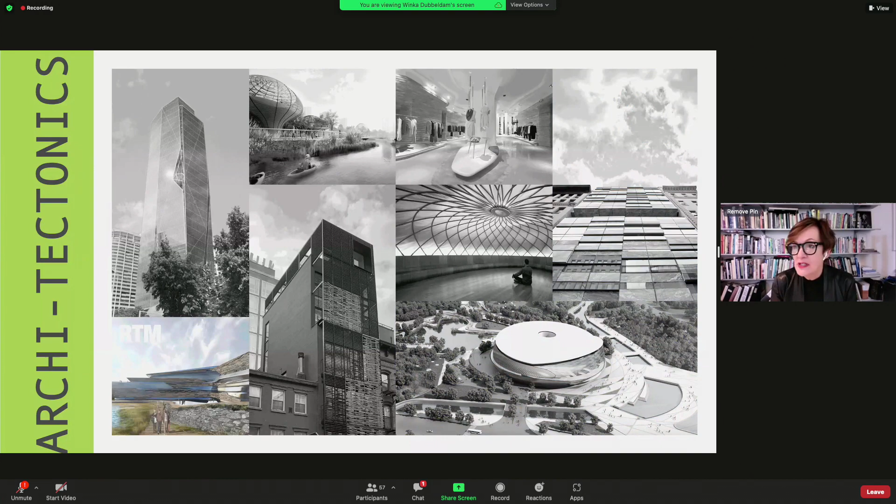So yeah, what you see here is an office that is trying to specialize in innovation, not in typology, so not like either commercial or residential, but really thinking about innovation in the widest sense.

I think also we look very much at the idea of a different kind of aesthetic or different kind of beauty that really comes from deep investigations or rigorous research, and hence will give the project character and identity, but not as much maybe what we would call a standard beauty.

We're more interested in the notion of the sublime, as mentioned by Edmund Burke, and his notion of terror and fear based on the sense of awe. So awe in the sense of understanding things that are striking, maybe even dangerous, or have an uncommon beauty or an uncanny kind of character.

So a lot of this will be investigated or is investigated in the prototyping phase. So this is just a small overview.

Most of our projects, of course, express themselves in built form, as you can see here, a glimpse of the Asian Games. But also we like to share our ideas with peers, with really any person.

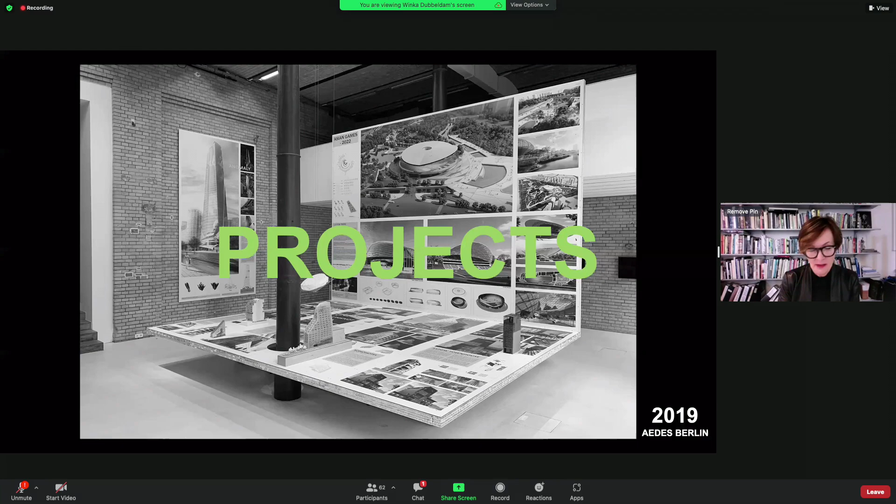Of course, books are ways that we otherwise also investigate both our own project, but also communicate this. These are the first 3 books that we published with 010 in Rotterdam, Princeton Press in New York, and DAP in Germany. And then the latest project is the Strange Object, New Solids and Massive Things.

And this book, rather than a traditional monograph, is really conceived as a manual and maybe itself as a strange object. And it reflects this non-standard way our projects come into being.

The book was designed by WSDA. You see on the left-hand side, Jonathan Jackson and Janet from WSDA, edited by Julia from Original Copy, Julia van den Hout, who's next to Janet.

And then next to me, you see my business partner, Justin Korhammer, and some people of the office that helped work on the book. There are more people, but I always say it's, you know, the virtual world is infinite, so you'll be on the other side of the slide.

And then this is the book. So WSDA really designed the book itself as a strange object in kind of an understanding of a below-the-surface manual or taxonomy of our work, and considers each project according to its particular formal or performative characteristic, thus establishing overarching areas of research and narratives, but also reflecting the singular nature of the design process and the final outcome.

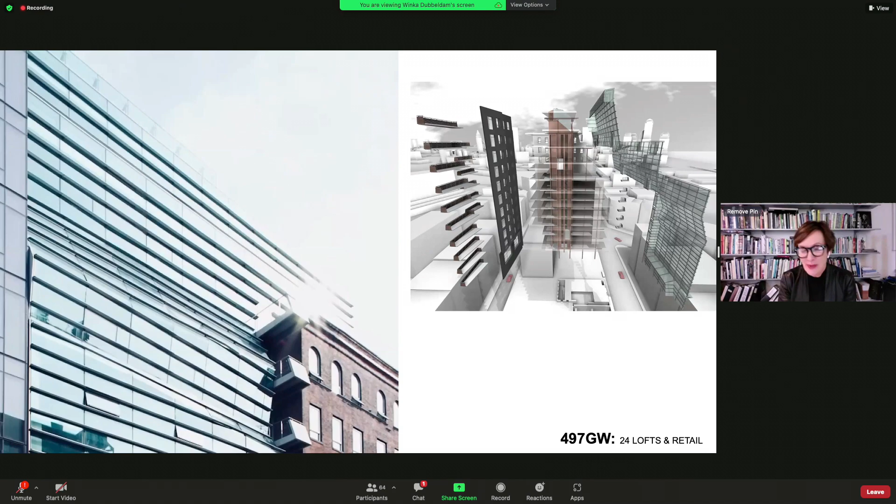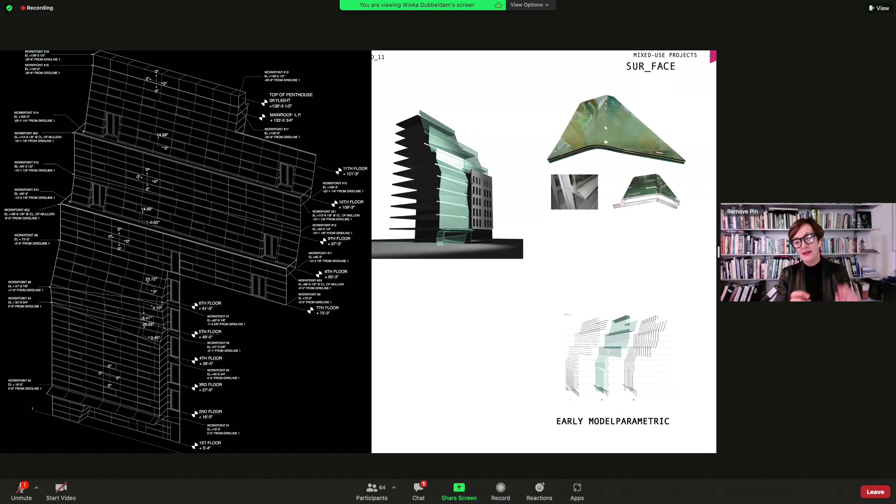One of the very first structures we built, very early on, is this building with folded glass. It was the first kind of idea of parametric thinking, where we made a 3D model. We sent only the XYZ coordinates to the people who folded the glass or extruded the mullions in the same direction of the glass, and also separated vertical and horizontal mullions, with vertical being welded thin steel holding the glass at a distance, and the glass itself not being a grid but a set of bands.

Very shortly after, we got interested in making a landmark building in Tribeca, of translucent stone - one of the first buildings to have translucent stone on the outside. Usually it's a beautiful alabaster skin on the inside. This building glows by day on the inside, by night on the outside, and it kind of rethinks the idea of a landmark.

Normally in New York you'd copy a landmark building, but looking at the landmark district, every building was different. So I proposed to the preservation committee to look at proportional systems and material quality, and go from there. We took the rhythm of the two neighbors, intersected it over our building, and came up with a 3D pixelation for the facade.

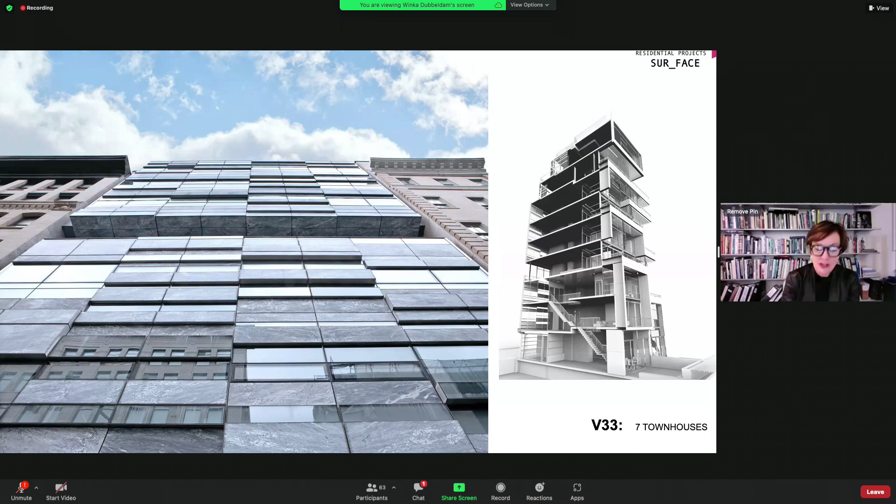That we prototyped in Italy. The stone originally used in Tribeca comes from, funny enough, a quarry in Portugal. So we went to Portugal, got the same stone, and then worked with a facade consultant on getting this 3D pixelation in a way that also made the facade openable and varying at all times.

This prototype was made in Italy. We had German mullions - the only ones who make thin steel reinforced mullions, called Schüco. Schüco is actually made in America in a very dumb system, so we could not fathom using that.

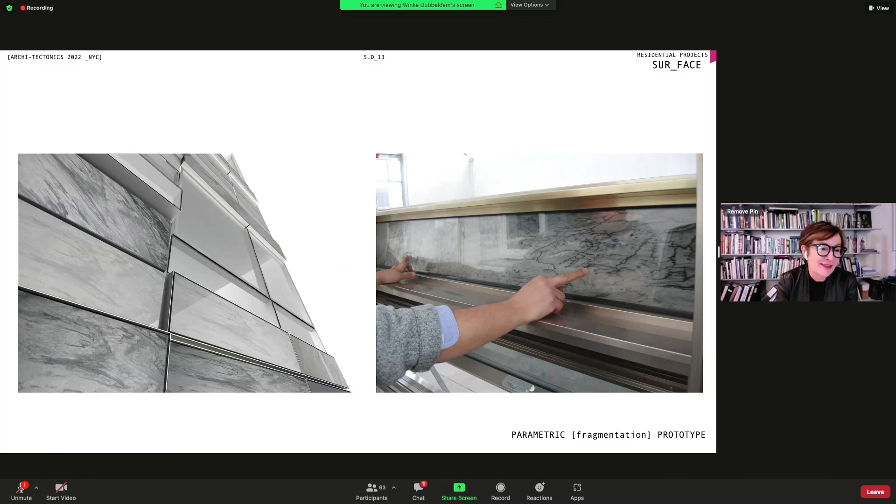And then a tower we're working on currently, still in design - I'll show it very briefly - is a tower that thinks of anomalies. The idea of anomalies, which is also a chapter in the book, works with the idea of, let's say, 80% standard, 20% non-standard of a building, especially when a building gets much larger, like this tower which is 150 meters tall in Rotterdam. The anomalies occur in the form of what we call sky lobbies, which are also kind of green lungs for the tower.

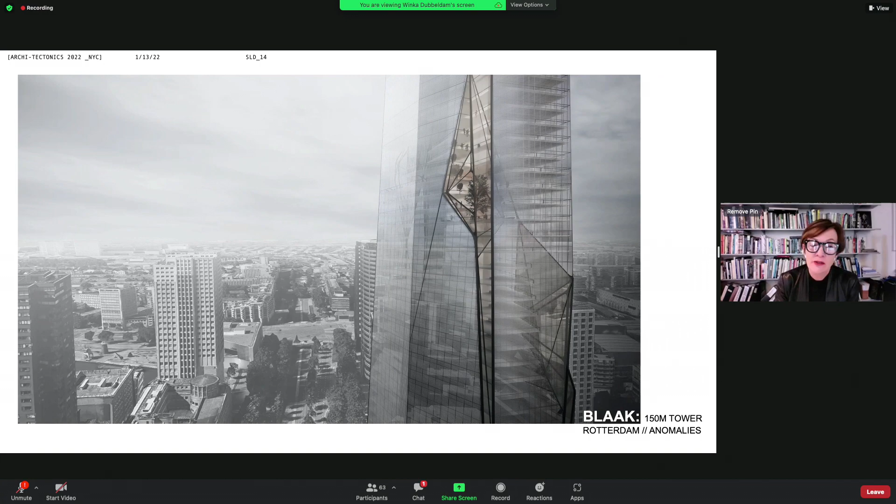They are completely differently fabricated, prefabricated, made more like pieces of furniture, and create entirely other conditions within the tower. These sky lobbies wind around the tower on different elevations and different facades, and are connected with thin lines that connect the sky lobbies all the way up the tower, which then at night you start to see as arteries connecting the sky lobbies.

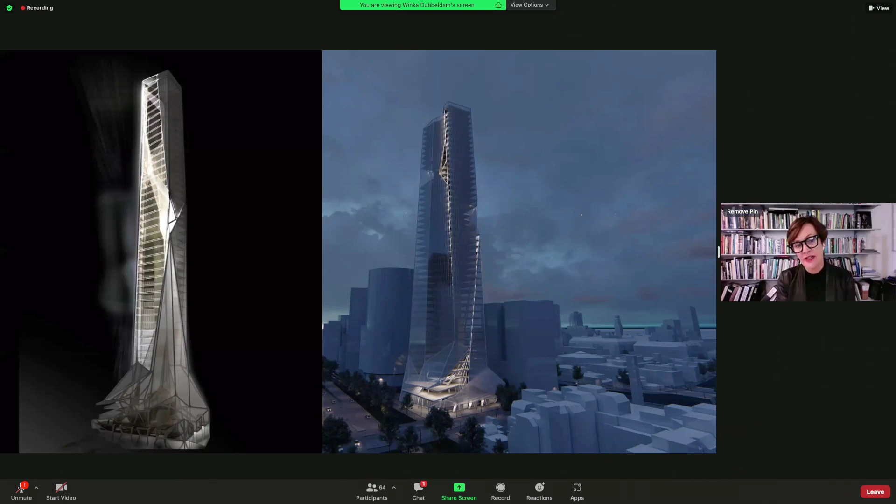The sky lobbies mostly house public functions such as libraries, restaurants, and gyms for the building, but also for the city. So the idea is to have the public areas on the ground floor, which is mostly retail and restaurants, pull up into the tower, as if the city is occupying the tower itself.

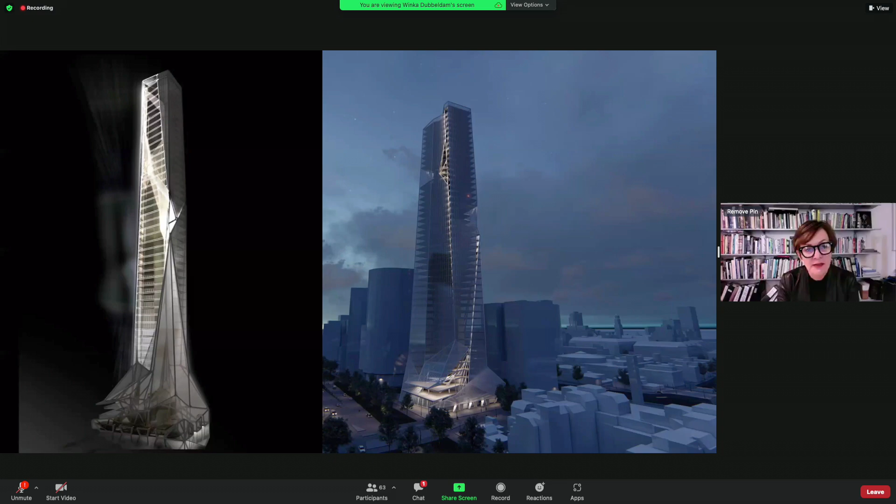We just won, yesterday, which is why I'm putting it in, the design award for a very strange structure - probably one of the smaller projects we've done. But we actually like doing small projects to investigate and prototype things that we can hopefully use later in larger projects. This is quite a funny one though: an 8-story townhouse for one family in Soho.

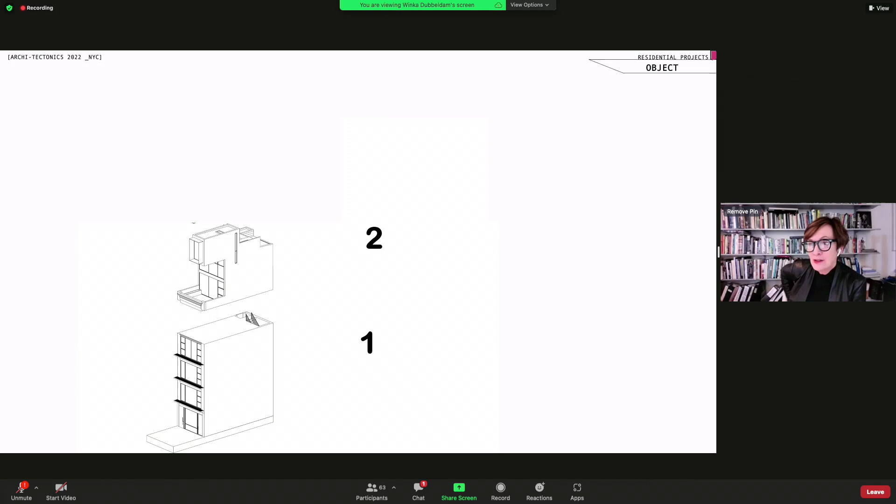We started to notice that the original building, number 1, was extended by number 2, which followed all the zoning and setback codes of the city. They were approximating the same size, and we realized it was time for number 3 - an extra large volume set back from the building in all directions through balconies, terraces, and roof terraces, creating external space around the building.

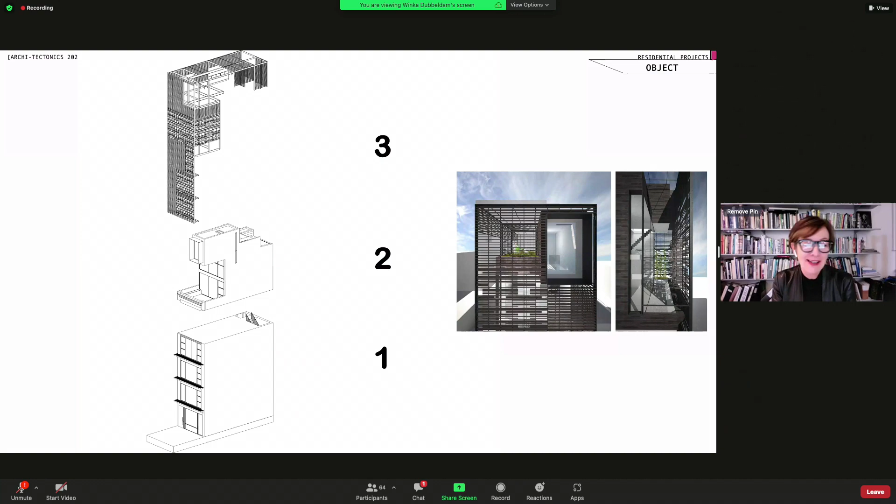But as it's made of movable slats and a steel frame, for the Department of Buildings we called it a sunscreen, and sunscreens don't have DOB restrictions. So we made it a lot larger than the building was actually allowed to be, since it was 'just a sunscreen.' I think the city did not quite understand that concept, and let us get away with it.

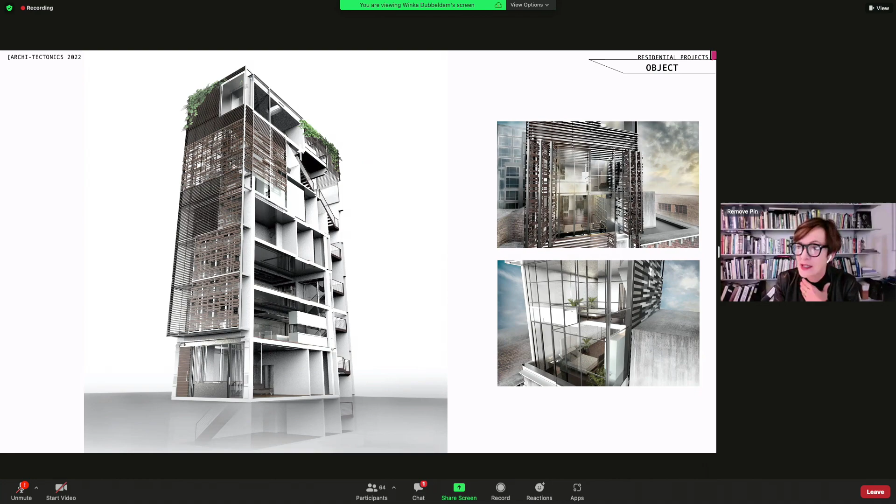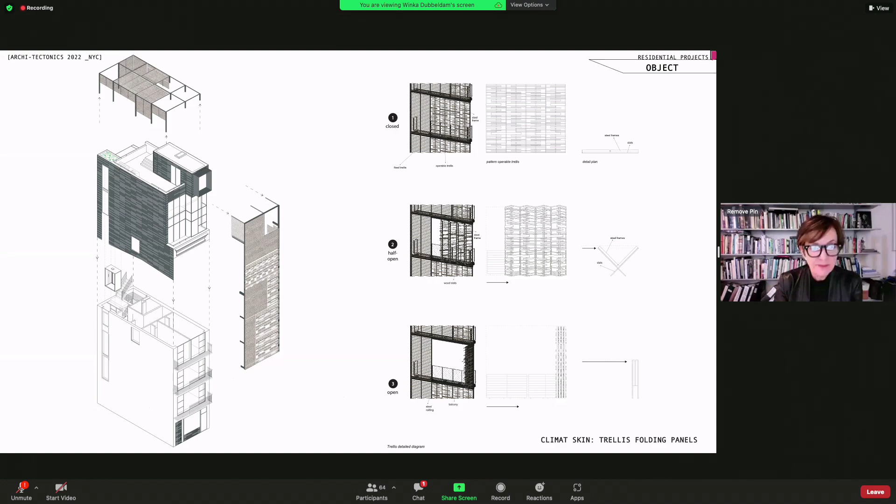As you can see here, this trellis is also used for green gardens on the top that can grow plants down, and is openable, so that we really can play around with climate conditions. What we felt was very important was that the trellis would transform. We call it the climate skin - it would transform as the panels open. If the system is closed, the panels are in line, and if it opens, it feathers out like a bird wing. We had to prototype that because it was a little tricky, especially with fingers in the neighborhood - it was quite an excessive movement and a very large feathering.

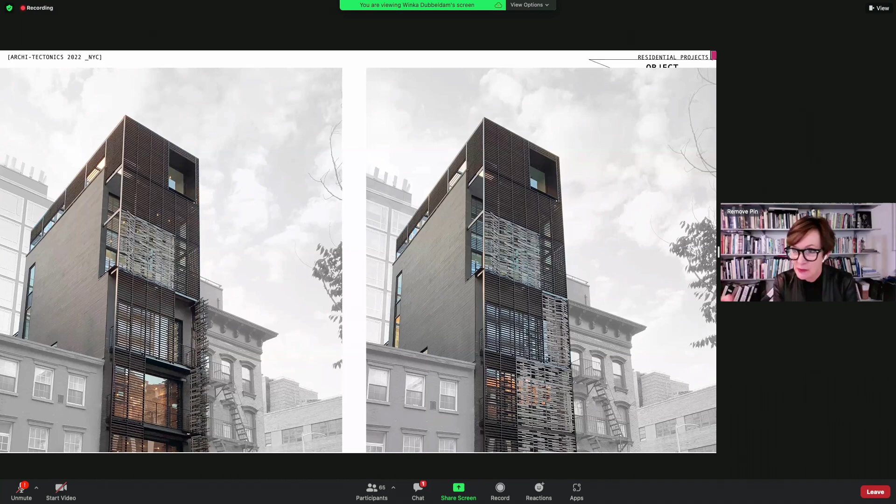What is quite fun is that in summer, when you close it, you get natural shading and ventilation between the screen and the building. In winter, if you open it, you get passive solar radiation. We actually calculated with a plugin - the Honeybee Rhino plugin - that we could reduce energy use of the building overall 45%. So that's an annual saving of 45%. That was quite interesting.

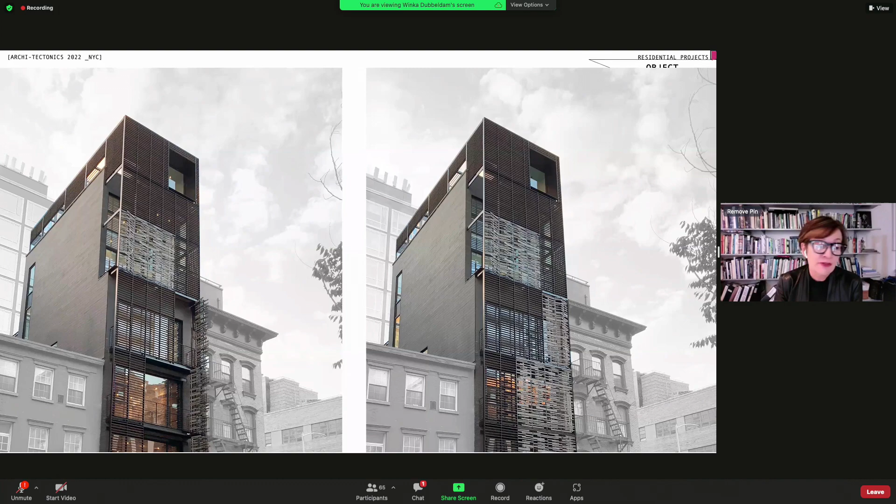And you get these weird transformations. The ground floor building is an old industrial building, a tiny industrial building, so we just cleaned it up - we took paint off everything, so you have the rough beams and the rough walls. Here you can see the difference. Now you're looking out over Soho, and in the summer it would be closed, so you get this really interesting zone between the two skins.

In the back you get this interesting condition where you have an 8-story black stair moving up and a glass elevator. The glass elevator is lit by a slot that we cut all the way 8 stories through the building, and south light comes in. There are a lot of vertical slots in the building to give it continuity. It's very small floor plates, so it was kind of interesting that each floor has its own living circumstance, connected by stairs.

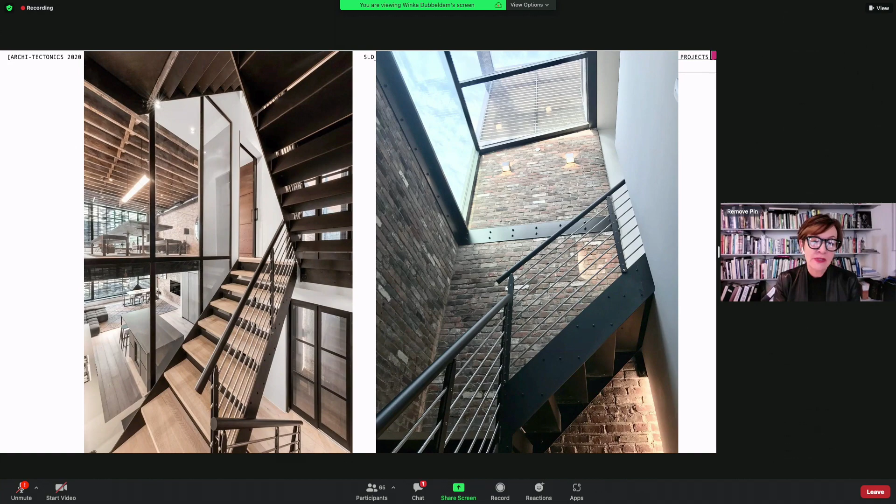Here I'm standing on the top of the building where you start to see these vertical slots, and also the way you can occupy the space between the building and the trellis. So you can see the transformation happening here as well.

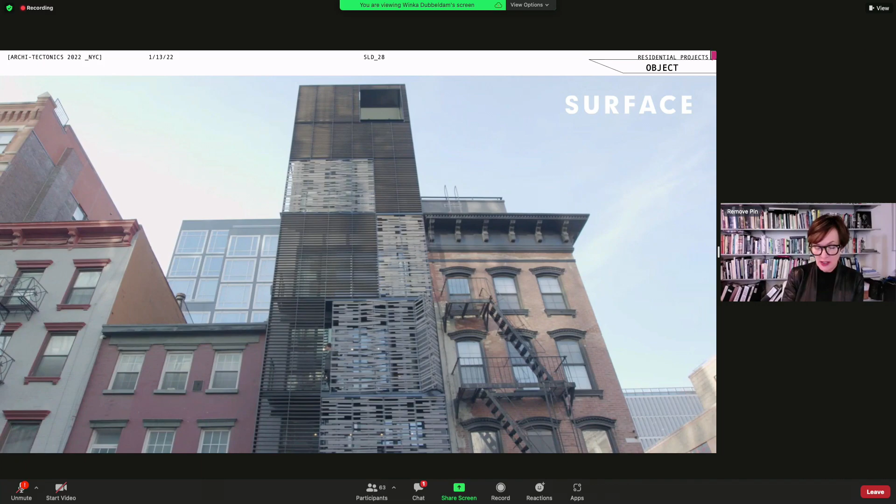I'll get into think shapes. Think shapes for us are - every project is considered an object in the sense that we feel it has to be 3D designed. We often work in a way that is probably closer to industrial design, in the sense that rather than making smaller presentation or representation models, we are interested in making one-to-one prototypes, as you might have noticed.

We do that because we feel it's very interesting to see whether we can use those prototypes. Architecture being often the one-to-one prototype that is then built, and that's it. Car design, they make million dollar prototypes because they're making a lot of cars, so they can spread out this investment. We have the problem in architecture that we don't have that luxury of repeating endlessly what we innovate. So the innovation really has to come from one-to-one mock-ups and prototypes, and then immediately also building it - you go through this innovation process really fast.

But what we hope is that it gives individuality and character, that prefabrication will make for clean and wasteless production and faster production time. And obviously architecture can also be branding.

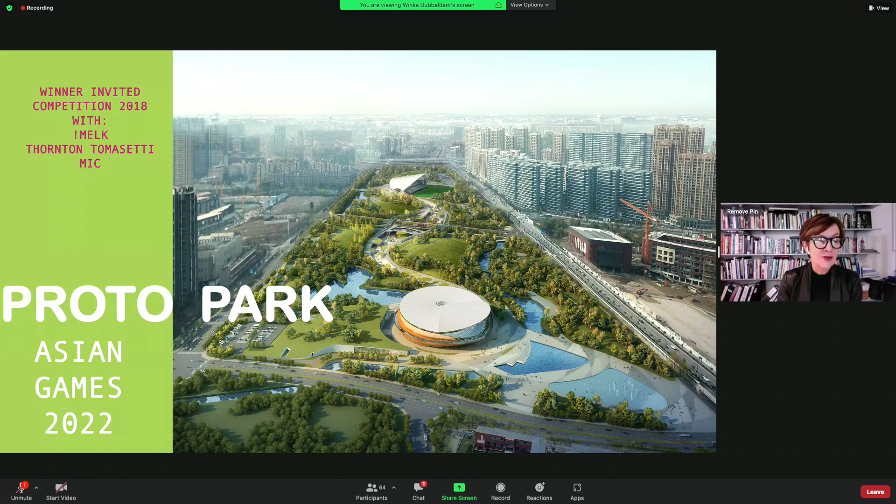So Theo just mentioned this - we won a competition for the Asian Games 2022 in May 2018, with landscape architects called Melk here in New York, a Dutch office also located in New York, same building actually as we are, Thornton Tomasetti as structure engineers, and MIC - Mobility in Chain - Italian traffic and mobility and infrastructural engineers.

And we decided to change something. Typically, as you might know, architects have sub-engineers and landscape people under them. We felt that - Jean Nouvel once mentioned in a lecture at Columbia that he did 45 competitions before he won one. Some people are much faster in that, as Patrick knows, who I see on the little screen here, but yeah, some of us are not. I thought I was approximating that probably also pretty quickly, and thought if you can't do it the way you always do it, maybe we should drastically change the model.

So I proposed to my business partner to go in as equal partners with Melk and Thornton Tomasetti, the structural engineer and landscape architect. Also, in an invited competition with 5 offices, you get about 6 weeks to do a 116-acre site with 7 buildings, so that's not a small challenge.

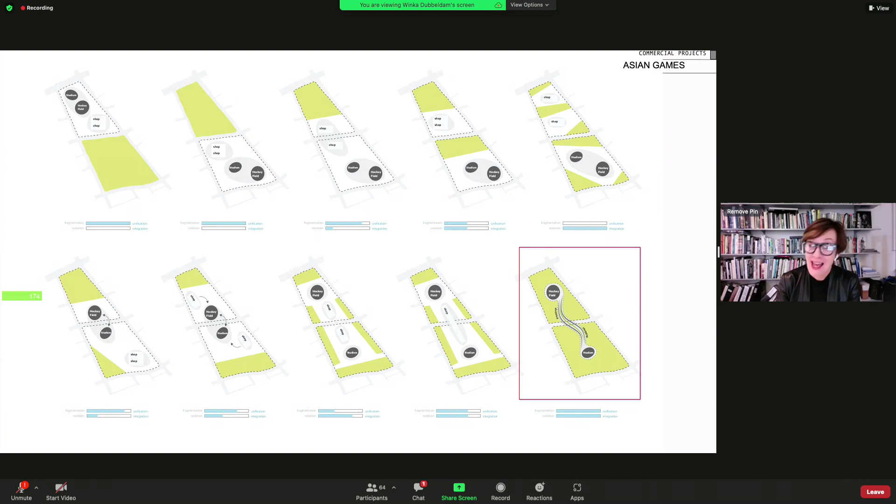We knew as a team, we had this discussion that breaking the rules of a competition can mean two things: one, you get disqualified; two, you win. There's not much gray area in between that. So we took that decision as a team, fully aware of the risk that this might be a problem.

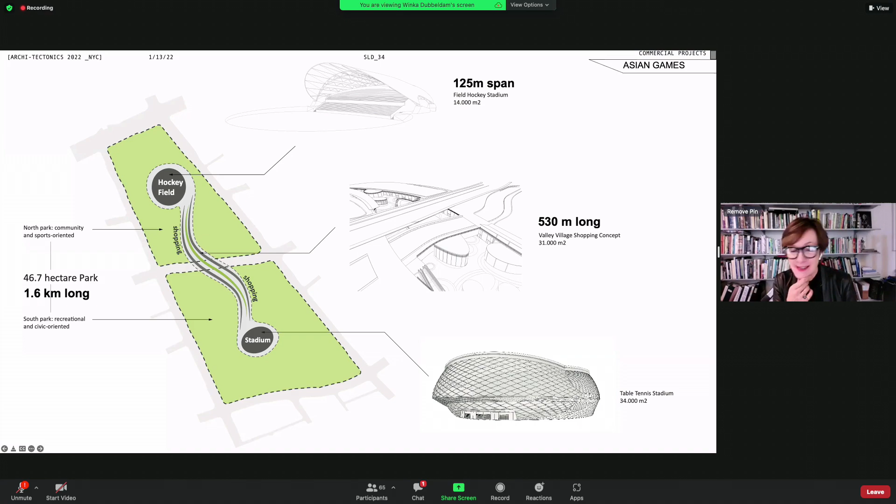So here you see a little bit of the data. The hockey stadium is about 14,000 square meters, with a span of a 125-meter wing for shading above it in one big gigantic sweep. There's a 530-meter long shopping mall with green roofs, solar shading, and escalators to the road. And of course, the river had to become an aqueduct.

And then there is the hybrid building for table tennis and concerts. Now, we looked immediately at the idea of other users, so we started to look at potential activities for the park in sports, cultural, food, nature, entertainment, and connectivity.

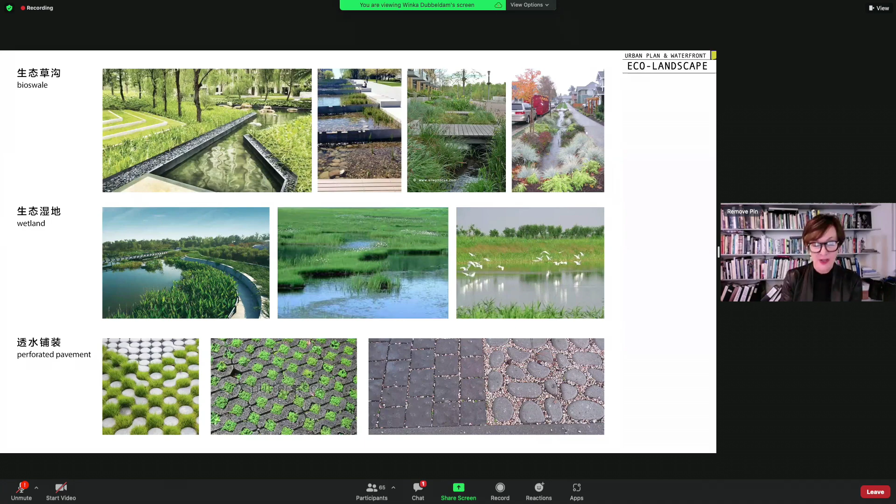And we were very focused on making this idea of the sponge city work. So the idea was to have bioswales to filter and retain stormwater, to create wetlands. Originally, the site had wetlands, but they were completely destroyed and built over, so we decided to bring quite a bit of it back, introduce local vegetation, restore the local biome, and introduce perforated pavement where we had to make paths.

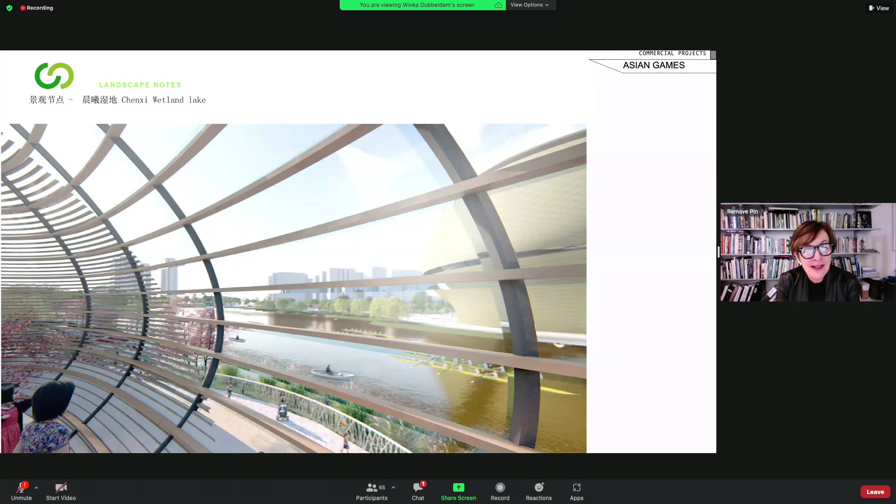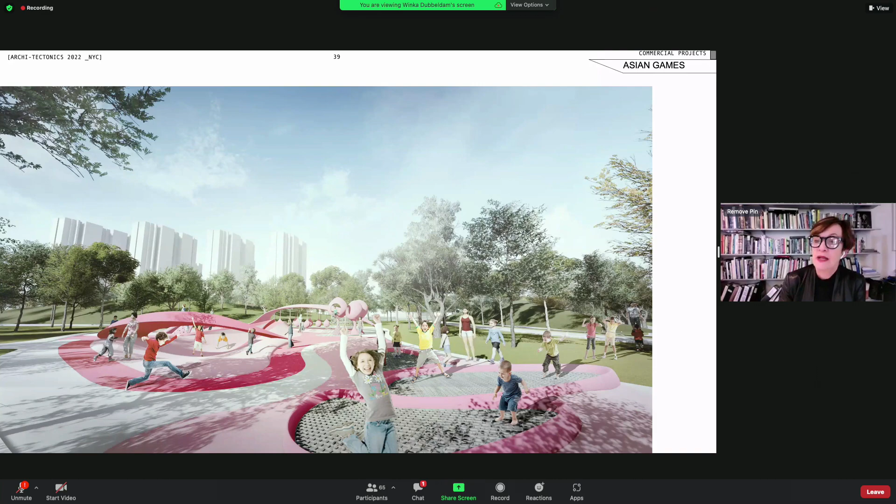Wetlands are not just functional, they're also extremely beautiful. Here you see the bamboo tea houses we introduced, and here you are in the tea house looking over the lake. It's a very large wetland. And of course, we made things for use after the games, such as playgrounds, skateboarding, and things like that.

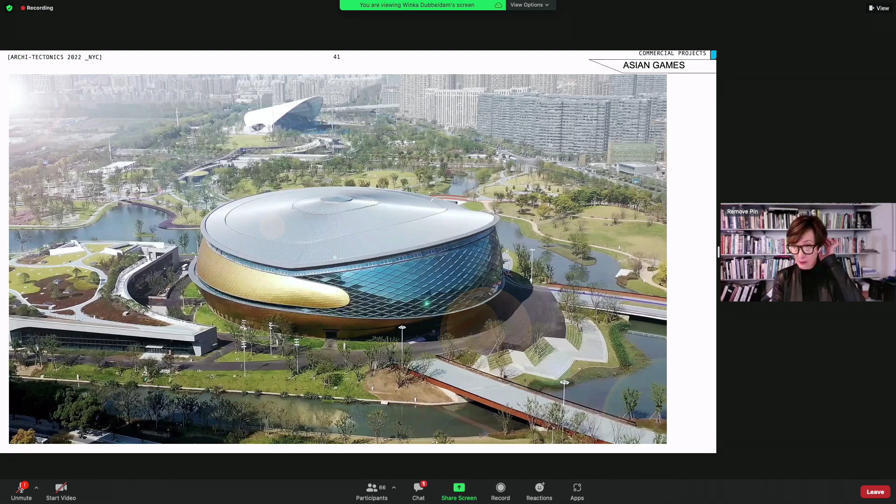What was quite strange and fun is that the competition in 2018 was actually held after an initial competition done in China itself. The results weren't what the committee wanted, so they made it an international invited competition where we were invited. That meant the time was seriously constrained. So while we were announced winner, our drawings were already taken and they started the landscape right there and then. We won around half of May, and by half of June they were digging for our mall and creating the viaduct. What's strange is you can see we're actually nearing completion very fast, a year ahead of schedule.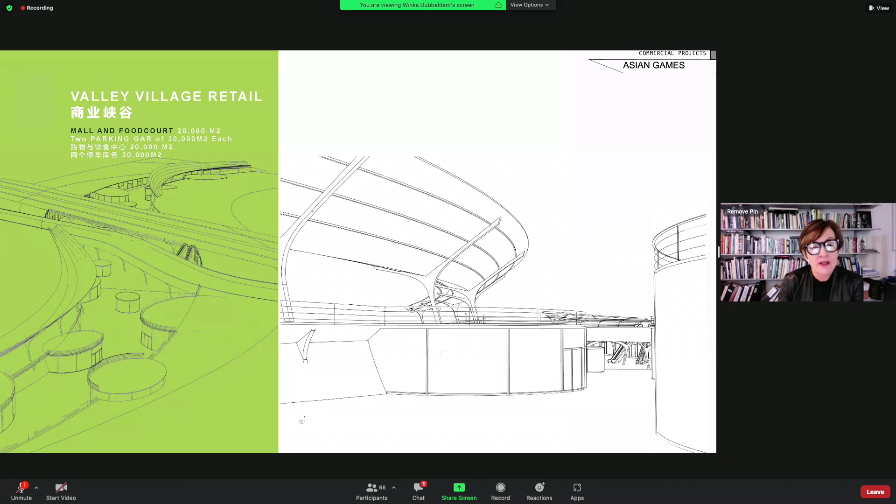I'll go through the programs first. The Valley Village has essentially a 530-meter long spread of pedestrian bridges going over the road and river, with the Valley Village itself going under, small pavilions with green roofs and glass in the green park as it dips down. On the sides there are long stretches of retail and restaurants with underground parking garages behind them, all with natural ventilation and natural daylighting.

What was great about trying to achieve this sustainable aspect was one of the requirements: a zero earth strategy. That sounds futuristic, but it's very basic - you promise to keep the earth you excavate for the wetlands, the Valley Village Mall, and other underground things on site. This was actually quite amazing because the two buildings you see are really tucked into a very hilly landscape, with hills going up as high as 17, 18 meters, which also creates an incredible silence in the middle of the park.

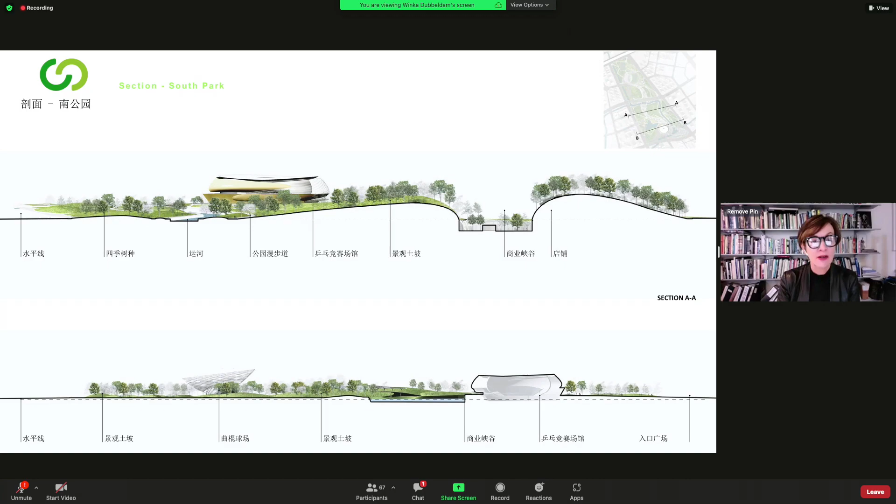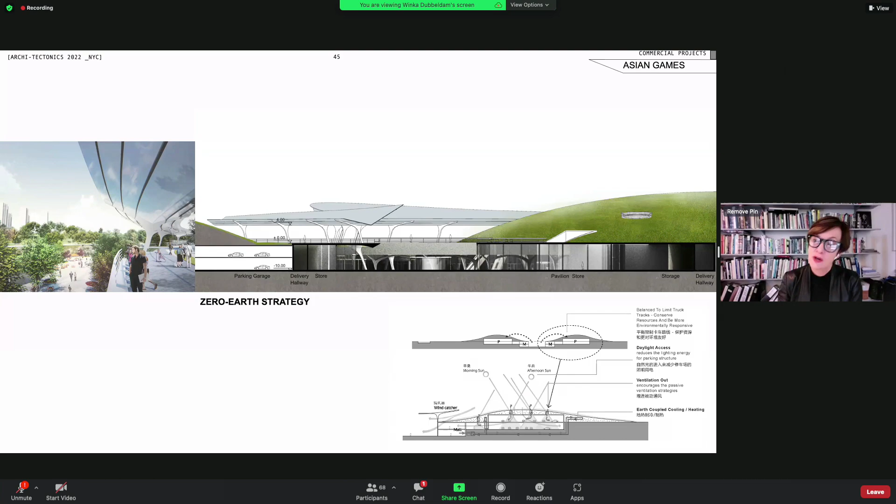On a sensory level, it's really nice to have these very high hills. Here you see that principle - how the Valley Village has these underground parkings connecting to it, with earth on top of the parking, and wind catchers that also have solar panels. These long awnings providing shading and wind down in the Valley Village also have solar panels, so natural lighting is always on, obviously also for safety.

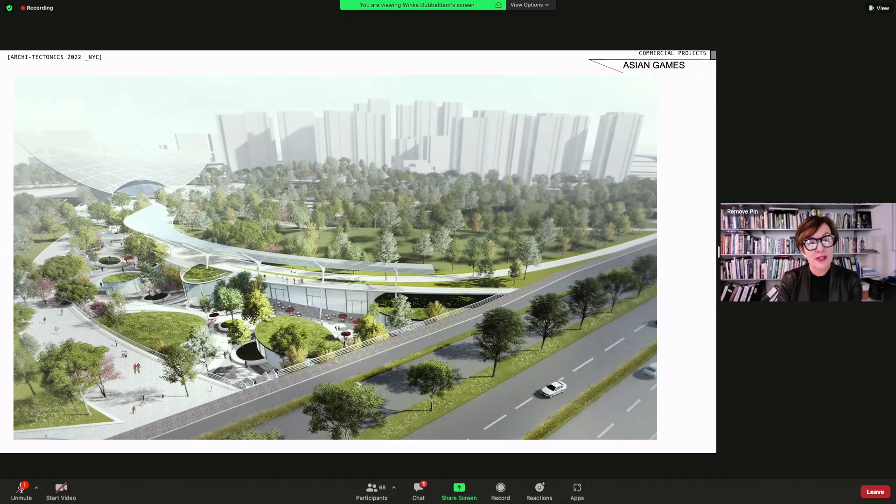Interesting, of course, is that under huge pressure they also had no time to deviate. So we gave all the construction details, all the drawings straight to the contractor, probably a little bit behind the back of the client because they were asking us for details. I'll explain a little bit later - this had something to do with COVID.

One of the stadiums, as I said, is a field hockey stadium. It's a kind of seed of life diagram. The seed of life is basically a sacred geometry that follows patterns in nature viewed from a mathematical viewpoint with broad implications. These patterns have corresponding symbolism interesting from an overall mathematical logic. The two ellipses represented here, one of the field and one of the wing, are basically following a symbol called Vesica Piscis, which is used for many other reasons as well. People who know a little history know a lot more about that, but we thought it was interesting.

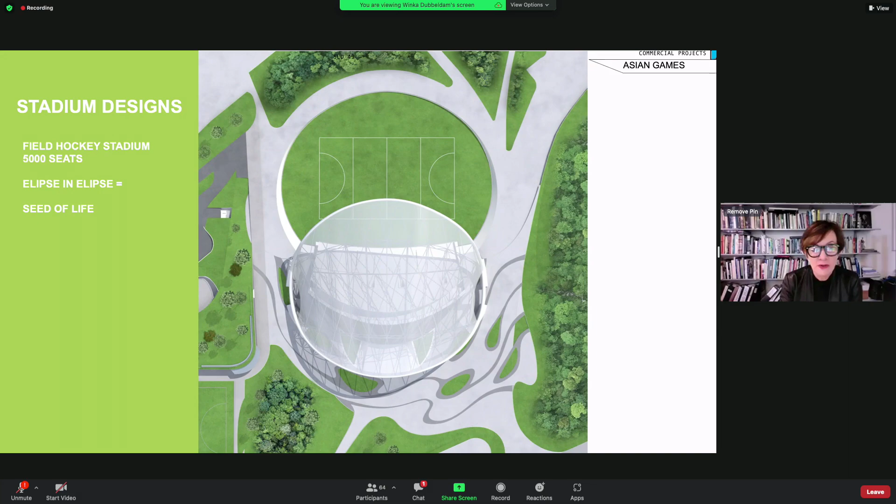And also the wing here, the 125 meter span, is covering these seats, which are about 5,000 seats. As you can see, the building itself creates itself by curving the arena slightly. The 5,000 seats behind it starts to occur another building that is the lobby building, that is a glass double curved facade.

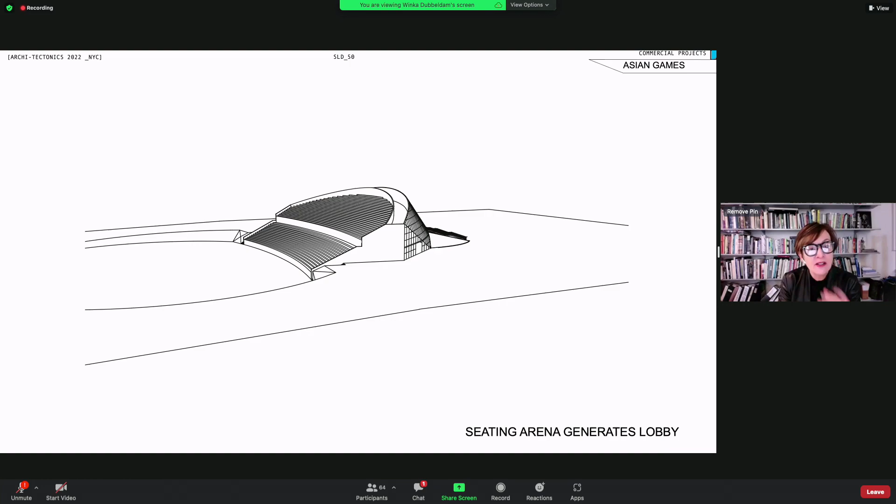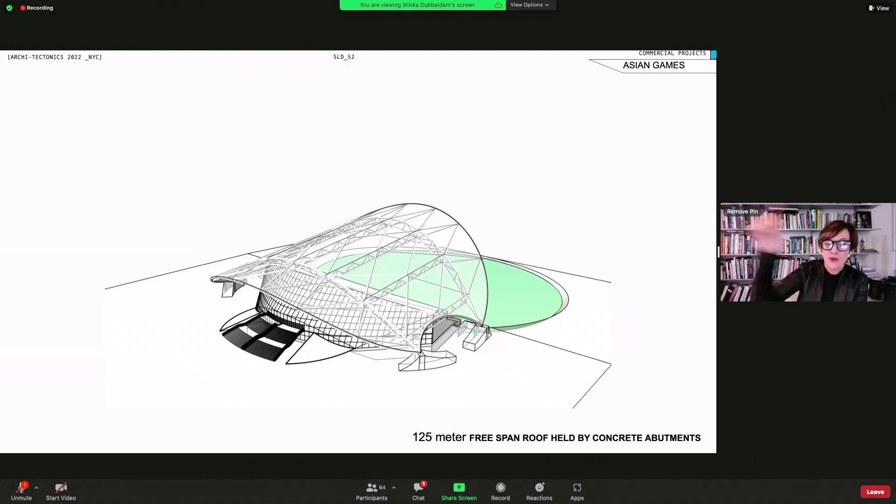You see the dip in the landscape, the wing coming over it. Now this wing is so lightweight that we needed to tie them down with concrete abutments that you see holding the wings here. Otherwise the whole thing would fly up. And essentially the wingspan are two big trusses that fly basically from one to the other and are completely free of the building. So this wing never touches the building.

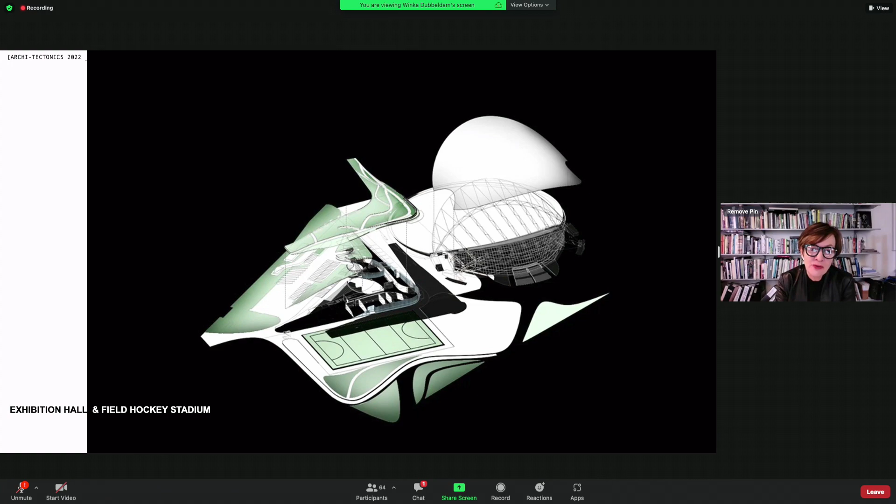And of course there is again a hidden building next to it, an underground building, and that is the exhibition center that has a green roof and has glass facades, but really tapers down to the ground.

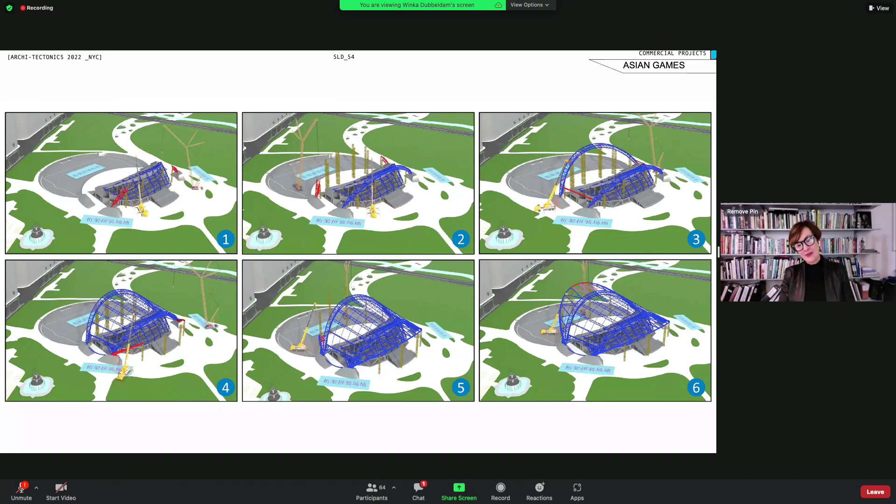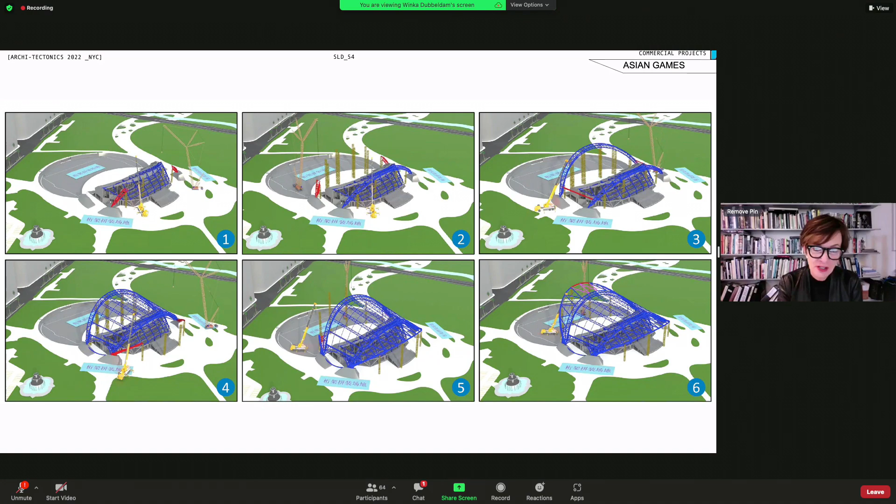Now, the way we worked through COVID, and I think it was really interesting, I think we actually got a better grip on the whole process, was through our 3D Rhino model went straight to the contractor who made it into a 3D BIM model. And then from then on, we worked with them on BIM to kind of figure out erection methods, optimization of steel systems, and ways of building everything faster.

So through BIM, we actually managed to save overall 1,120 tons of steel. We shortened the construction time by 20%.

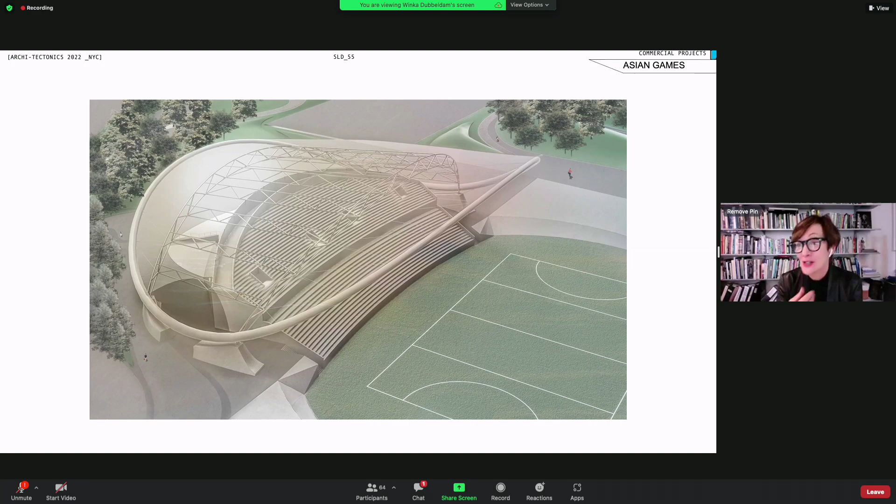And because I didn't want the structure to be so overwhelming, I asked them to tie it back with rods rather than steel profiles. And what was interesting is that the wing then had to have this massive ring around it that literally goes from a diameter of 1.5 meters to a diameter of 1 meter, which sounded like way too much. But as you can see here, if you put it on such a massive scale, it is actually quite in proportion. And I think the ring is quite beautiful.

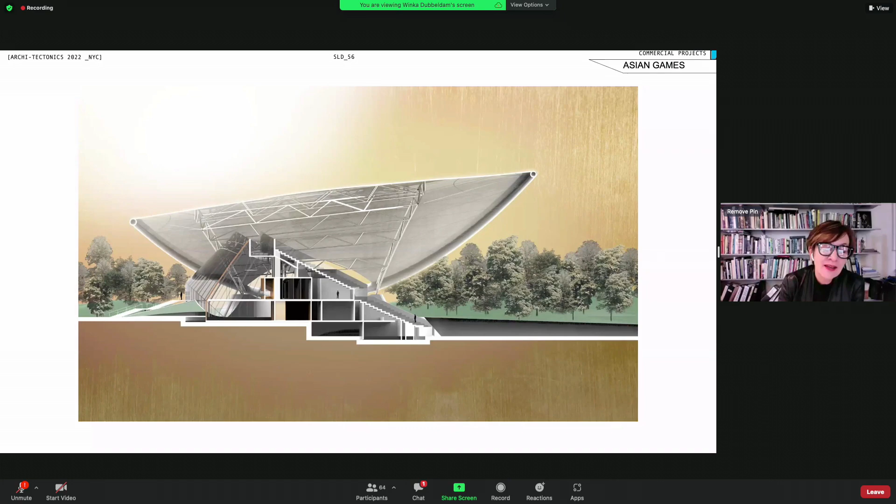So here, the section through the building, the glass facade on the left, the seats on the right. As you can see, the building also dips in the ground to get to that lower area of the field so that the field starts 5 meters down.

And then here you start to see the entrance as it's nearing completion. We also felt that the site had to move up to the entrance, so hence these small landscape areas moving up.

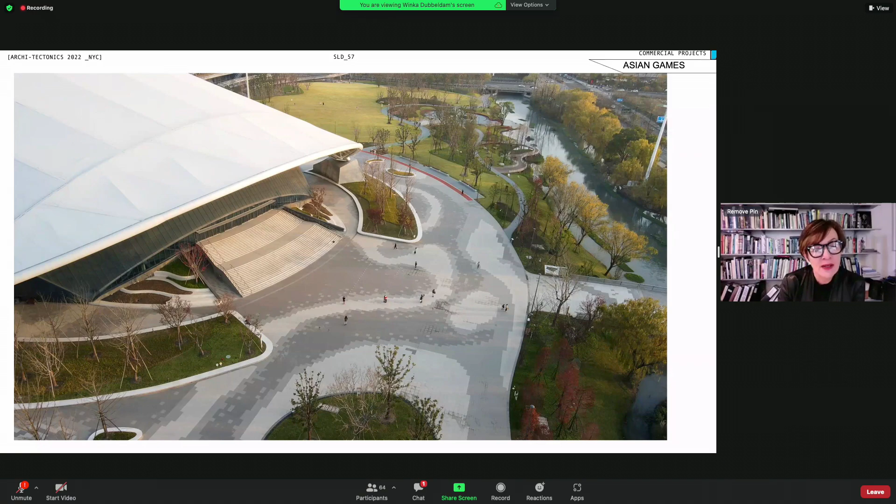And then this is the back view where you see the field as it's 5 meter dipped at the seats, which also makes the building sit really in the landscape rather than on the landscape. So the first whole section of seats is actually underground, you could say.

And then how this is turning out in reality. As you can see, they're flying through the construction in incredible fast ways.

And here you see how the Valley Village is starting to grow. The plants, as you can see, the green roofs are still kind of coming. We already went through a full cherry blossom season, which was a shocker because we went from a complete mud flat with buildings to grass and cherry blossom. I'll show you that photo in a minute. It's kind of very strange.

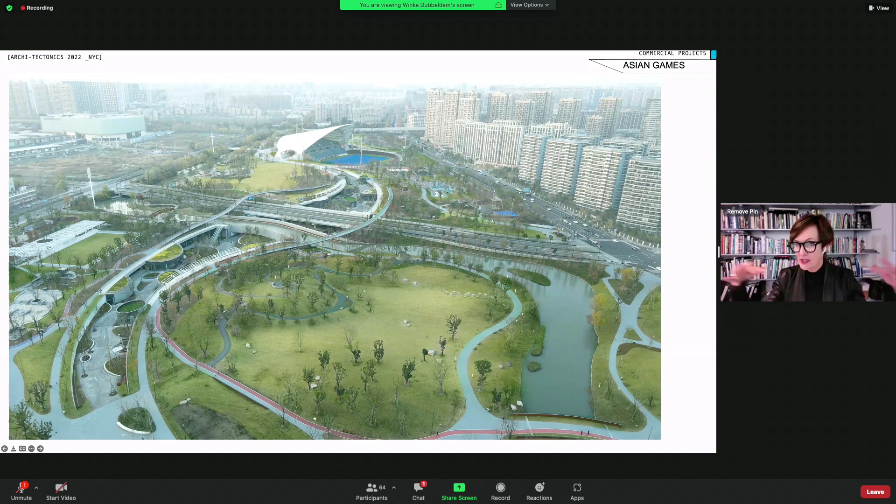But what you can see here also is how easily the site is connected, where the viaduct can be crossed over by pedestrian bridges, but there's also escalators going up to the middle road. So it's always trying to tie back feedback loops in and out of the site and in and out of the city. And then every road in the city is also connected back in the park, so the park is completely porous and accessible for the neighborhood.

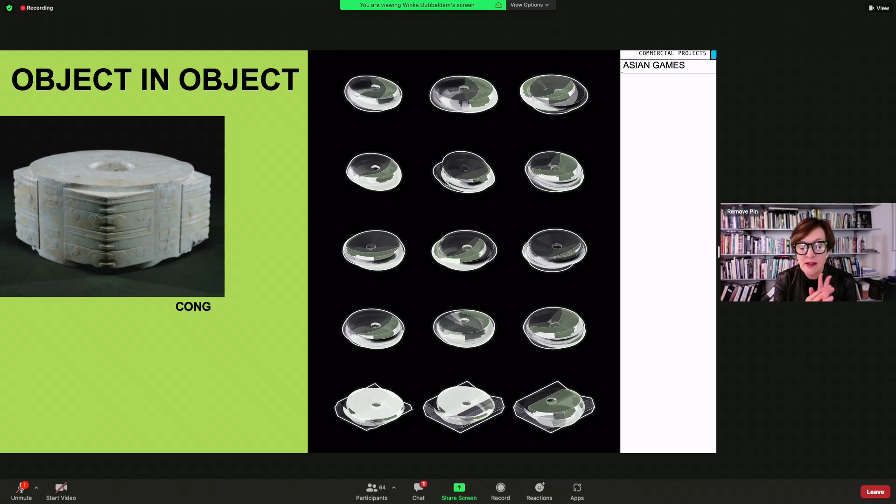We kind of found a mysterious object called the cong, and the cong is found in graves. It's a jade element, an intersection of a cylinder with a square. And essentially, we started thinking of the intersection and possible intersection and shift as a way to start to understand the building as a much more complex entity, which then again is an alter ego underground as a very large fitness center, and they are also connected underground.

The fitness center again with, of course, the green roofs, the skylights to give natural light and ventilation below, and the stadium with all its complexities.

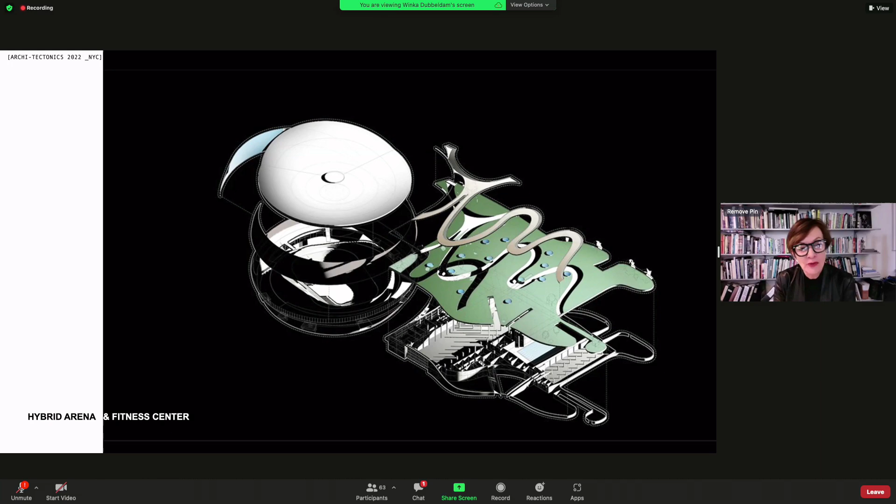So by intersecting these two volumes, there are two skins that are the direct resultant of it. One is a glass diagrid, one is a kind of brass clad skin.

And here what you see, the roof essentially is something called a suspendome, which means the roof sits on the inner bowl, cantilevers out over the rest of the facade, and basically carries the facades directly from the roof, rendering the building completely column free.

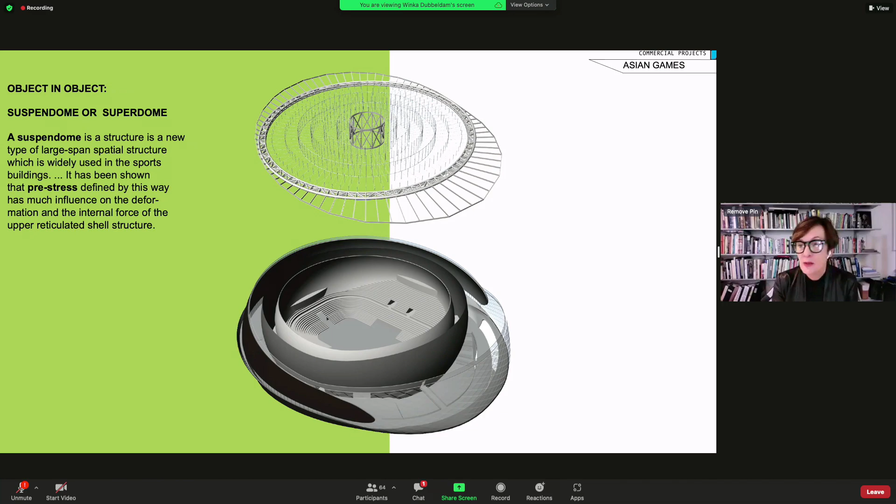So all that complexity inside, with ramps and stairs as you'll see in a minute, really allows for a set of multiple uses and double spaces, while also having no impact on the structure of the building.

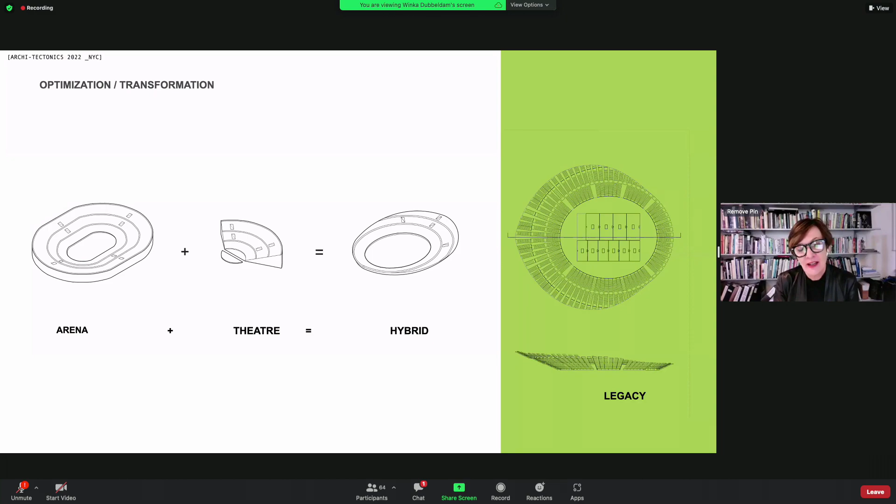We went as far as making a hybrid out with seating. So we studied the Olympic arena, the requirements for those, which are extremely strict, and the idea of a theater, and how we could make a hybrid out of the seating so it could be used both ways.

And then here you start to see that the roof in the middle also has a skylight with a deflector, so natural daylight also comes into the stadium.

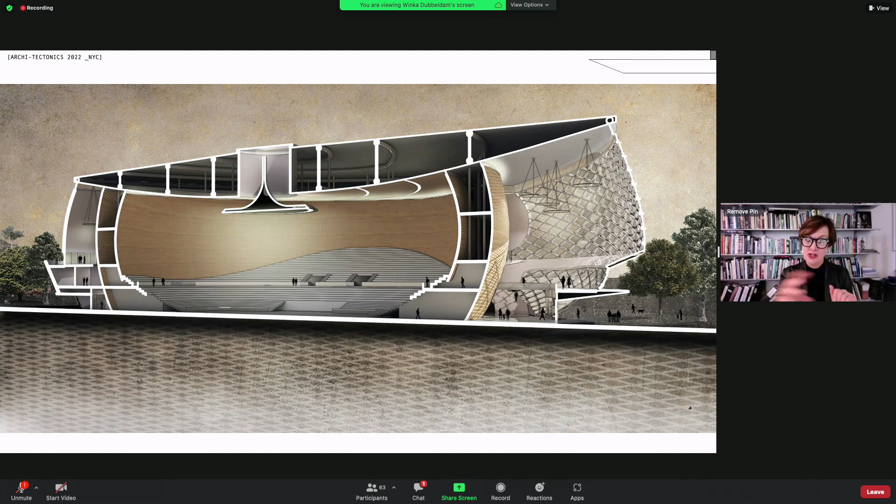And in the back, through the intersection on the left-hand side, through the shift, is a VIP balcony that overlooks the wetlands. In the front, the shift created a really beautiful indent with a large awning that is the entrance.

Here you have the brass shingle. So the BIM optimization, it was quite fun to play around with trying to get as few variations as possible.

So we managed to reduce the shingles that are doubly curved and intersecting doubly curved because of the strange intersection model we had. There's only 85 variations for 5,000 shingles, which really helped the contractor make it affordable.

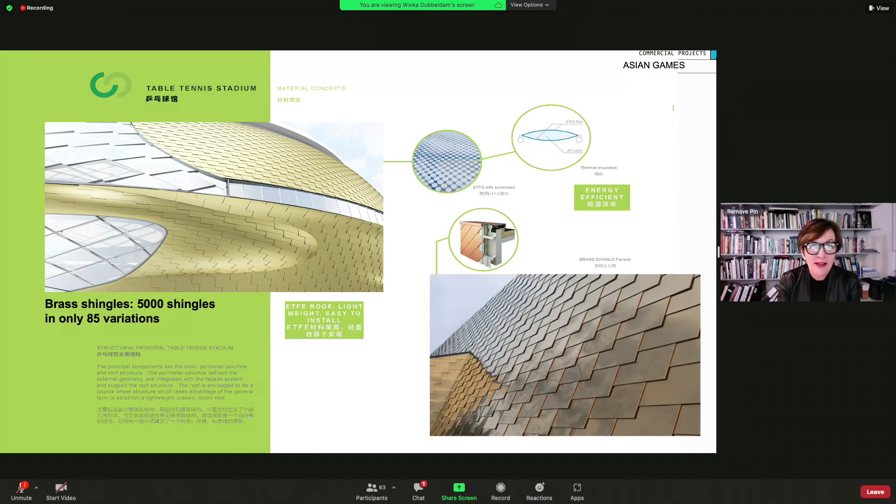And then the diagrid, we were interested in having this the largest possible diagrid. So the actual span is about 10 meters, the height is 5 meters. And we were interested in keeping the glass planar and creating something like almost eyelids for the glass.

Which you can see here. They're triangular fins that allow the glass to negotiate back to the curve, which means that if the light hits it, you get all these little silver slivers picking up the light.

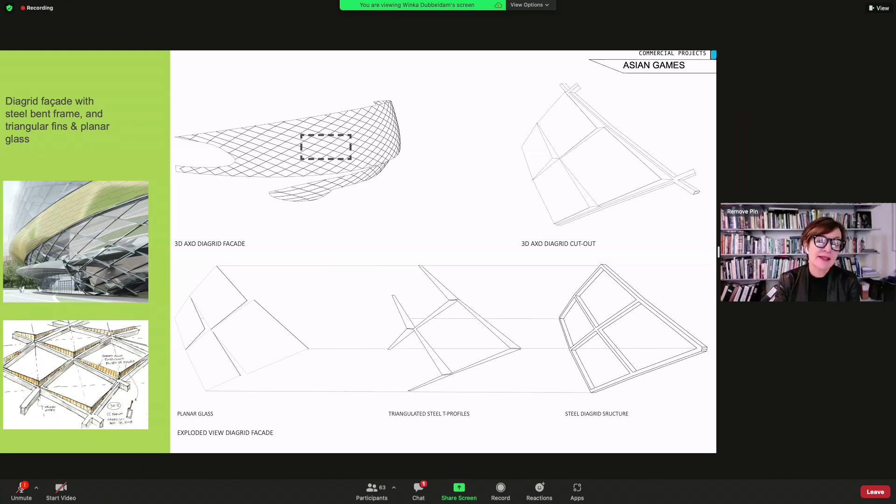So here you start to see the construction and how large it is, the tiny people. Here the glass is going on, and as you can see, it has this really very 3D effect because of the planar panels and the little eyelids.

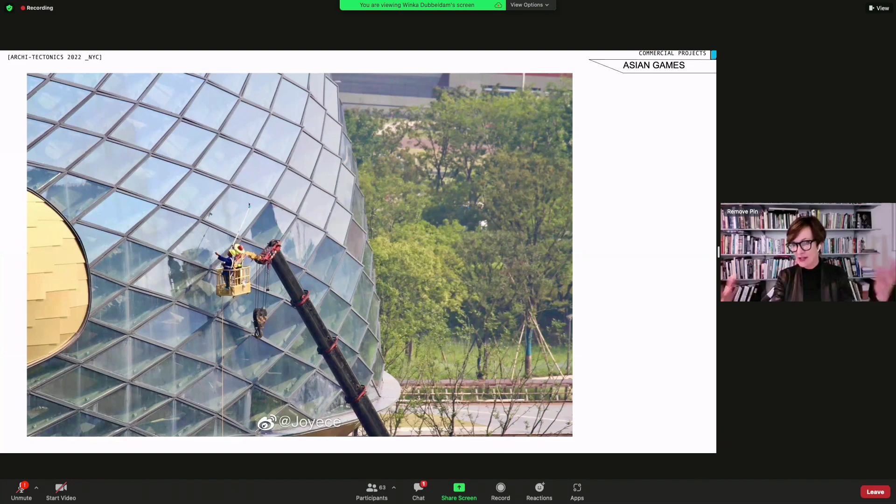On the top here, on the top left, you start to see the eyelids more clearly. And of course, as it negotiates the curves, the eyelids also change direction. So it's quite an interesting parametric device.

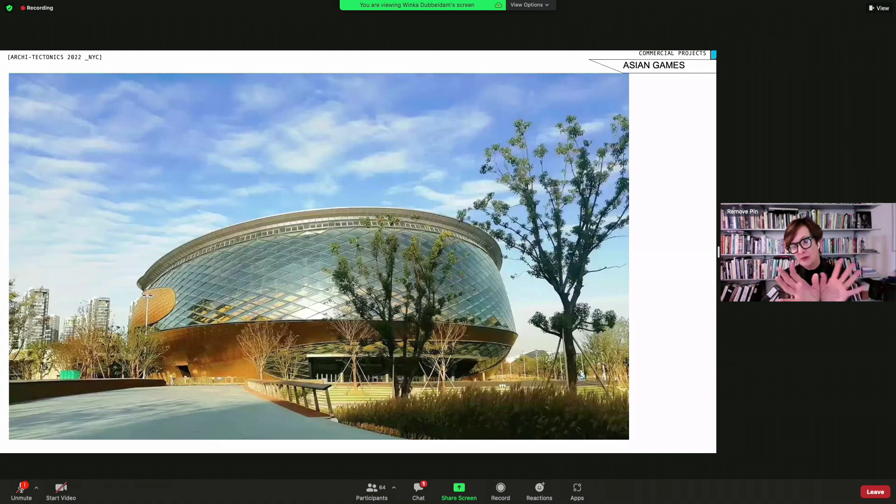And the intersection also means that the brass in the front intersects the glass. So where you see the glass coming down and then meeting the ring of the brass shingles, then again the glass comes out at the bottom.

So this highly complex intersection of these volumes created all kinds of interesting conditions. And the roof is negotiated by a ring of glass that is openable, hence allowing for passive ventilation.

Inside, we developed the ceiling with a set of slats and embedded lights that really stress the rings of the suspendome. You see the deflector of the natural daylight hanging below it.

And then here you see it as it works as an arena, but here how it can be transformed very easily as an event for concerts or theater.

So we actually just had an event, I'll show you in a moment, but I just saw it on Instagram. They had an event for 2,500 teachers and students in the hall, where they already did this. So they're far ahead of my schedule, let's say.

But they already were partying in it over the new year, so I'm really happy that that is a possibility.

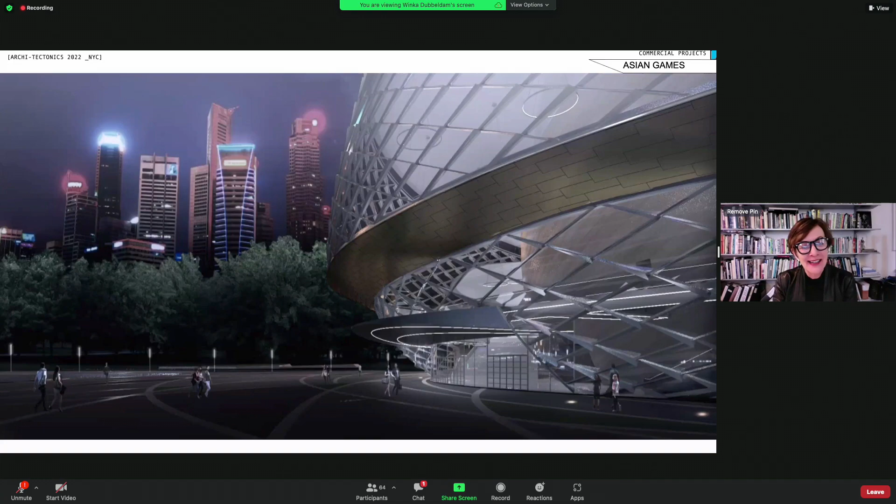And then here you see actually our render and how similar it is to exactly what you just saw, where this negotiation of the rings of copper and of the diagrids start to play into it.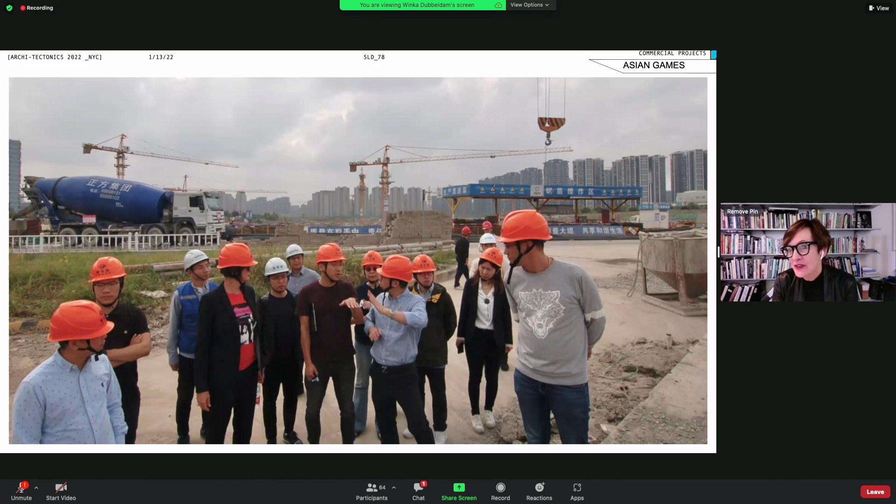Shortly after, this has been the fastest process ever. I don't remember much of 2018, to be honest. We all canceled our vacations and just started drawing, and kept drawing until February 2019. By then they had already started the foundations from our very first SD drawings - literally going on site, driving from building to building, 1.6 kilometers, not easy to quickly walk. All buildings started at the same time with about 300 to 400 people on site daily.

The way we managed, which I think actually saved us because these buildings are enormous in scale, is that we got to know the BIM guy of the contractor - the guy who was laughing in the middle. He declared his love for the project and sent us an email. We were like, what are you doing, can we see the drawings, can we help you with something? From then on we worked with him on the detailing in BIM.

Here you can see the drawings are extremely similar - the weird intersection, the strange bulging we wanted, all happened exactly as we had in our Rhino model. It's really thanks to this genius who was just in love with the project. So sometimes love comes into architecture in different ways than we usually think of.

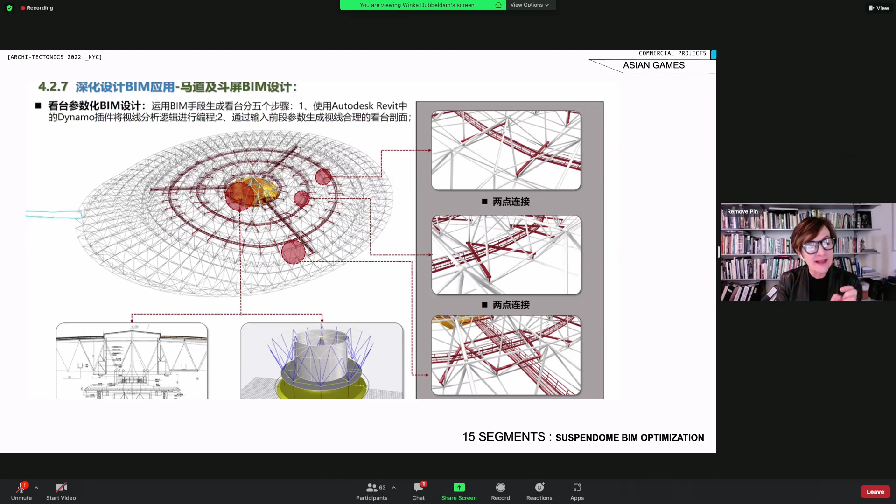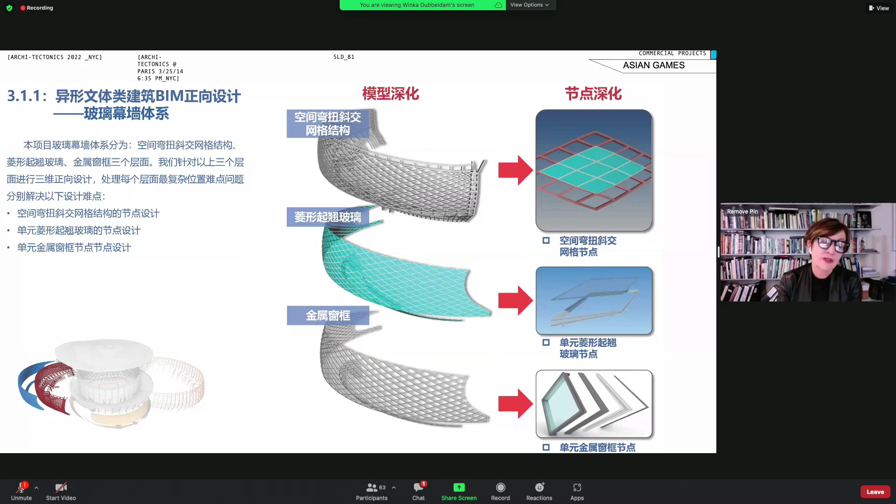Here you start to see this endless study of the skylight and how the deflector works - the little eyelids of the planar glass. It really helped because of the planar glass we could also make a double glazing, so the facade is super insulated. It has solar glass that deflects the light - when the sun is high it deflects completely, in winter when it's lower it allows some light in, so it can actually work for passive solar.

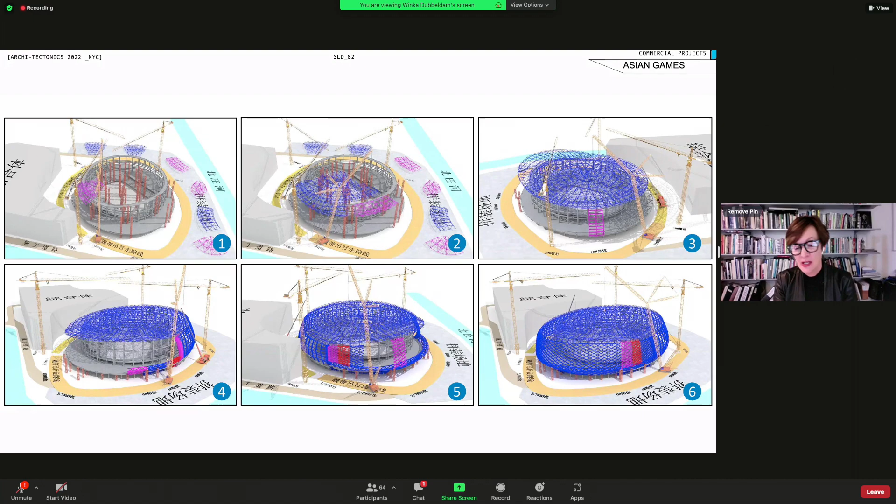This is what we then get from the BIM guy, who was very proud of being able to build tiny little cranes everywhere rather than one big crane, which reduced construction time by about 20% and the cost enormously. This is phenomenal - if you look at the tiny people sitting on the knots, you see how big this roof is. He managed to install the whole roof in just 15 pieces, which really sped up construction.

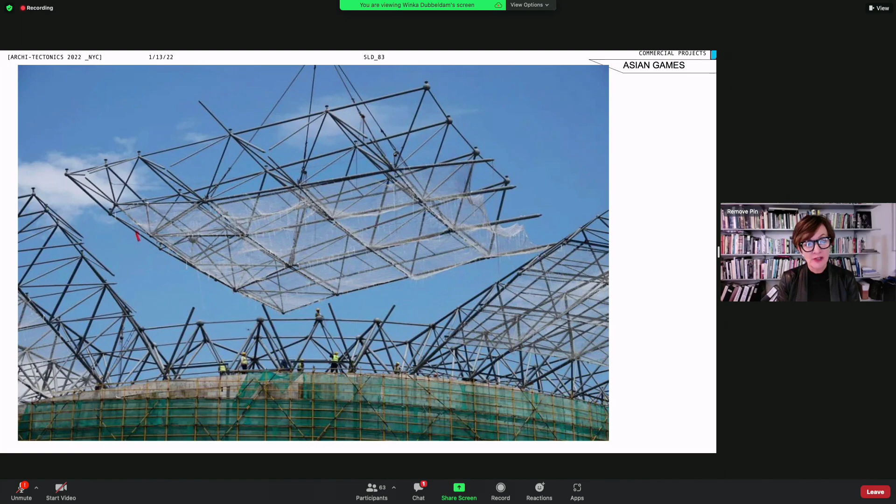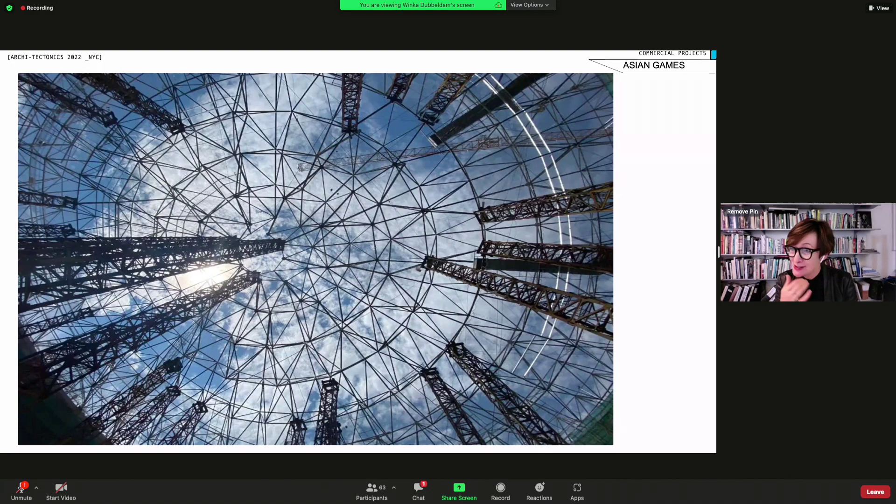Here you see the enormous amounts of tiny cranes holding the suspendome and how incredibly thin it is. The 1130 tons of steel saving was definitely here, also in the wing. By standardization of the curtain wall he also saved $1.2 million in cost, and the steel saving was $2 million in cost. It's really interesting to see these numbers flying by.

We were able to keep track of construction because our own team sent drones around on a bi-weekly basis, and I could go with the architect of record and hang with the drone in front of a facade. If you imagine these entry doors are about 6 meters high, you can imagine how high the building is - and if you wanted to do site supervision and see a detail on top of the curtain wall, it would not be possible.

But it was strangely easy with the drones and the understanding of the 3D-ness, being able to ask our guy in China to hang still for a second on the detail, take some photos and send it to the contractor saying, hey, that rubber up there, if you tuck it in a little deeper it will be much more beautiful. It was an incredible thing.

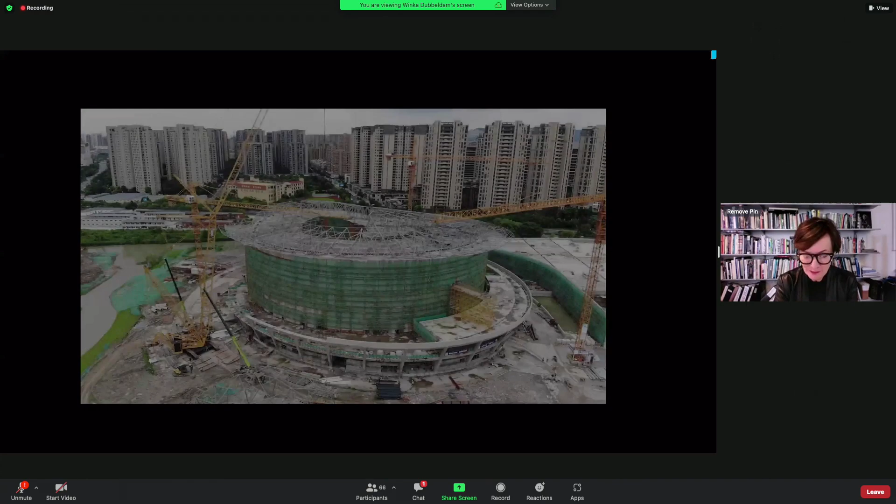Very daring people working here.

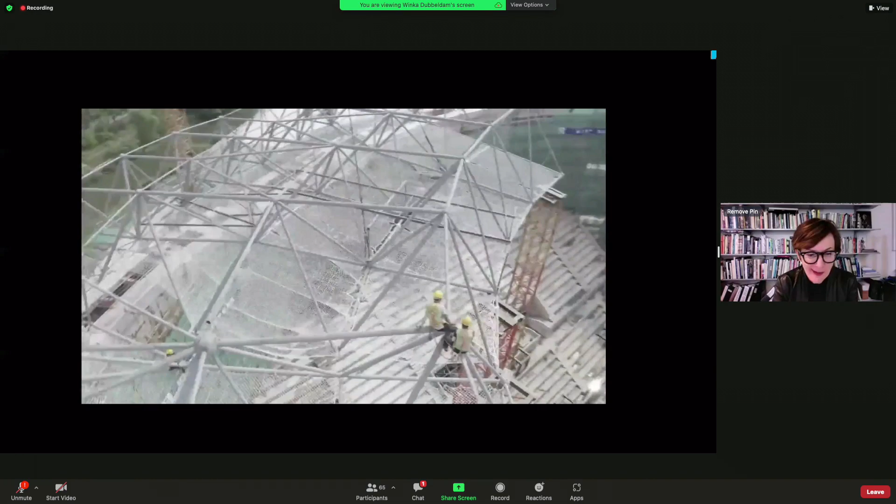And then here, the way the building is, as you can see, it's very close. There are some little cranes left. You see also in the foreground the fitness center, covered by this green roof. All these buildings have small slivers of facade for natural daylighting and, of course, entrance and ventilation.

It's been quite interesting to be able to make 7 sustainable buildings in a completely sustainable park, while still getting this formal complexity and this absolutely seamless collaboration. I have to say, after all the horror stories, and having had myself some horror stories working in China, this has been the most incredible experience where it's been quite seamless.

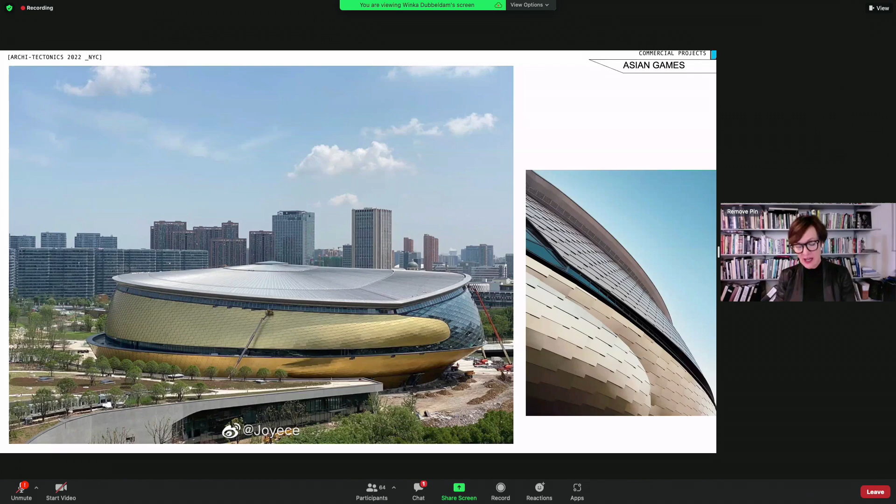Do you see the shift that I talked about as we were intersecting it? We also shifted the volumes, creating that VIP balcony in the back, which you see on the left there. And then this is inside the building. We literally have this render from ourselves, so it's really weird how absolutely similar the building has become.

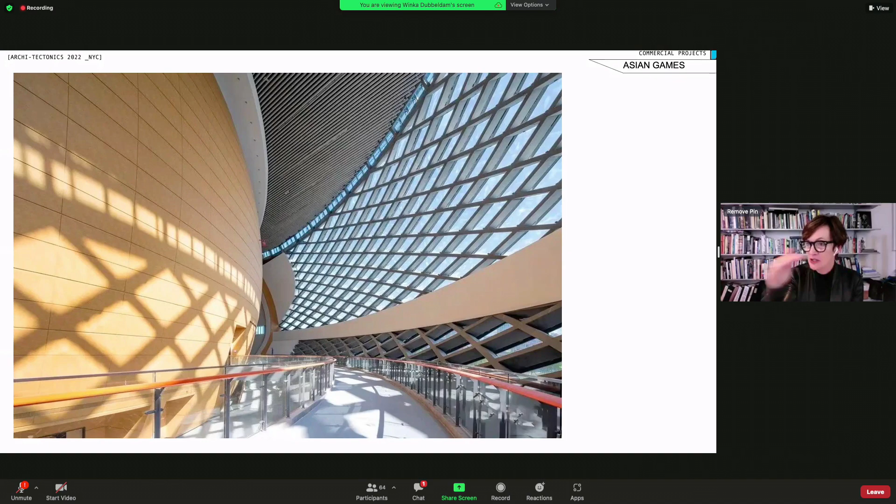You see one of the ramps coming down. So the VIP area has a lobby, which is the future kind of concert hall, theater, cafe, that has ramps flying down along the inner bowl back to the entrance lobby, and then also has entrances into the bowl from there. And then here you start to see the whole park.

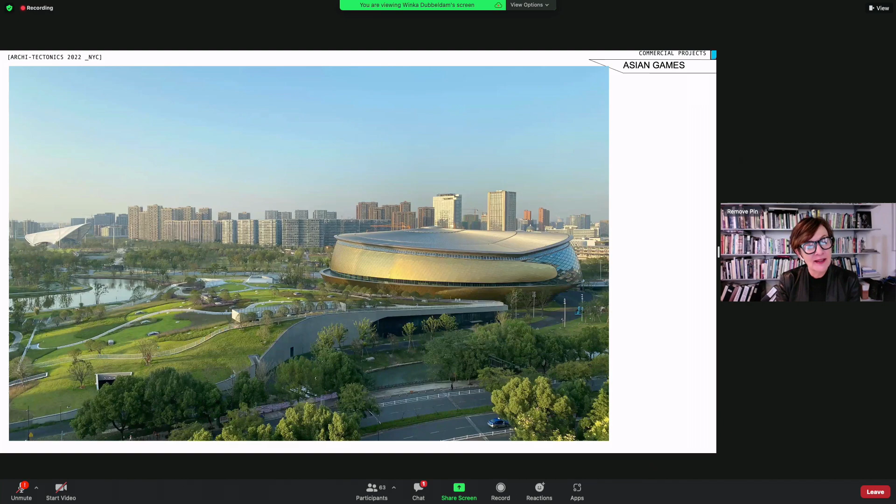All these tiny little glass things on the grass are all the skylights that are openable. And you see the wetlands surrounding the areas, the hilliness. And then this was what I was saying about at some point - the cherry blossom and the flowers were suddenly in the equation.

So we're calling it a set of wobbly discs that are kind of balancing and holding this space in tension, allowing for a much more open use, a much more accessible space, and also a higher complexity in the ways it can be used and circulated around.

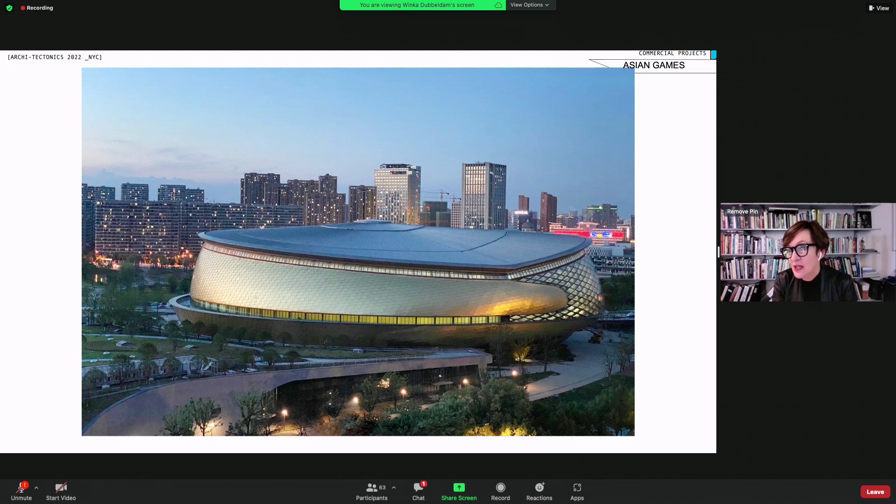And then this was the party. I don't know how they got that light on top of the building, but this was the party with the 2,500 teachers and students in the building, and somehow they managed to make this strange star thing on the roof that normally is never there.

And as you can see, the lighting of the park is slowly being installed as well. It's 47 hectares, so it's a very large green area. The reason why all these buildings are on the ground is because the stipulation was it had to be 85% park. So the 15% is really the two stadiums and the partial pavilions of the Valley Village Mall that you saw.

And all the other buildings are underground with a whopping 2 meters of soil, because for a tree you actually do need 2 meters of soil. So quite heavy concrete constructions, but very lightweight steel structures.

And all this and more you can see in the book that Theo just mentioned. Manuel de Landa was so kind to write a really great text for it, and there are many much stranger objects and solids in there with the 3 chapters. Thank you for listening to this, and if there's any questions, I'm happy to answer this, of course.